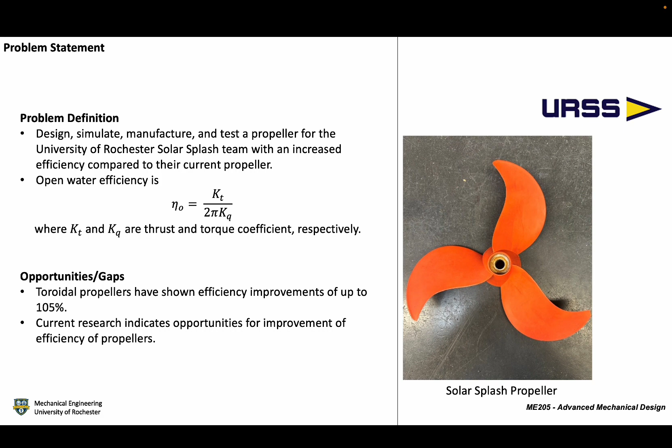In this case, there are three main deliverables that we are going to deliver to our customer, which is Solar Splash. First is the operational full-size propeller prototype that can fit onto the existing motor. Second is a technical report with testing data, procedure, result, and analysis of the propeller. Third is a theory of operation manual.

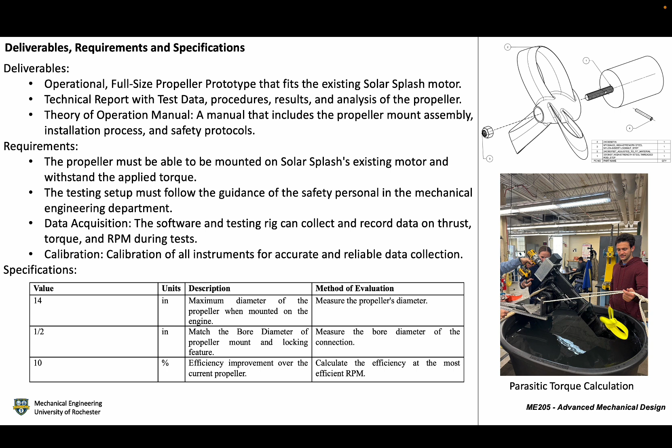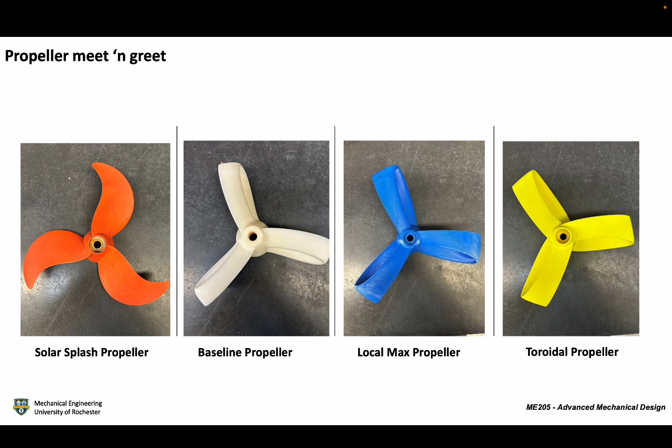So here we have a quick overview of the propellers involved in this project. The first one on the left is the current traditional propeller used by Solar Splash before the onset of this project. And then from left to right, the other three are in chronological order of the toroidal designs that we've made throughout the semester, with the first one being an initial conception mainly for the purposes of demonstrating the feasibility of manufacturing, and the yellow one on the far right being our final design.

The CAD generation was a key component of this project. We needed to create a CAD model that was easily adjustable, something where we could manipulate certain parameters quickly and easily so that we could quickly iterate and optimize our design without needing to go back and forth between our simulation software and our CAD modeling software. So in order to do that, we started by 3D scanning the original Solar Splash propeller. And then from there, we were able to extract the hub geometry and import that into a new model so that we could ensure that the new model would properly connect to the current motor and setup of the propeller.

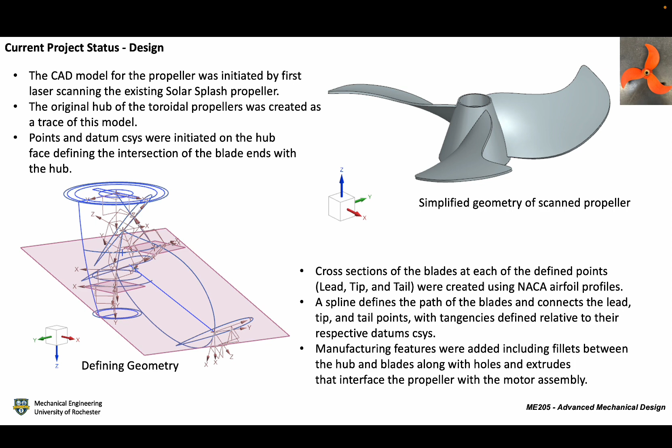One of the key components of this design is the cross sections of the blades. They are defined by NACA airfoils. Here you have the equations that govern the profile of the NACA airfoils. Using these airfoil shapes enhances our ability to control the aerodynamic qualities of the propeller blades, like the lift and the drag.

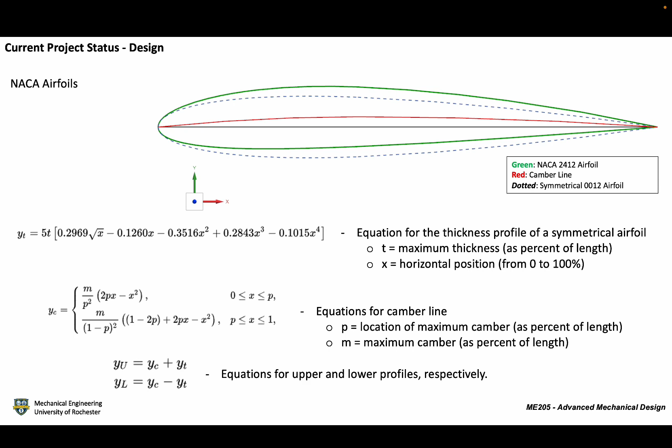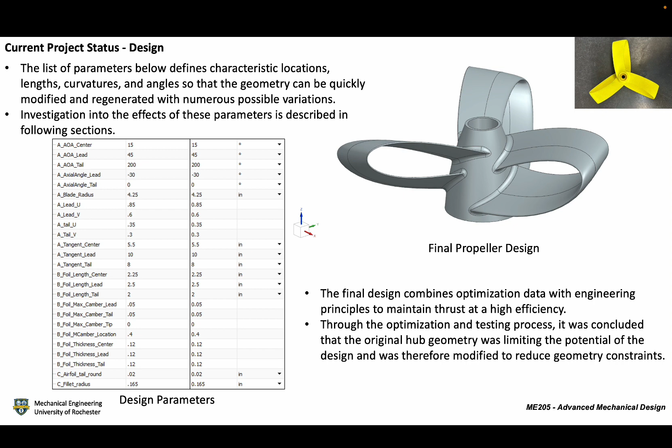So in the end, we ended up with a model that has quite a long list of parameters, as you can see here. These parameters are all numeric values that we can manipulate independently, so that we can import them into our CFD model and change them in there so we can cycle through design iterations quickly. These values dictate various locations, lengths, curvatures, and angles that define the overall geometry of the propeller. And as you'll see in the coming slides, we used this parameterized model to iterate and optimize using our CFD.

So a big part of this project was the optimization that would have to be done on our toroidal propeller design, and this meant that we would have to go through multiple different iterations of design. So we decided early on that the most efficient and economical way to go about this would be to create a CFD simulation that we could relate to our testing rig instead of having to 3D print and actually test every iteration we came up with. So to make this simulation, I followed a tutorial in Star CCM called the Marine Propeller in Open Water. And then I adjusted that tutorial to meet the needs of this project.

So one of the main adjustments I made was the geometry that was entered into the simulation. I created the geometry as an assembly in NX that's made up of a rotating region and a static region. And this made it so that I could sub in the new geometry for each toroidal iteration fairly quickly without changing anything else in the assembly. I could then transfer the design data from NX to Star CCM, and that includes the geometry and the associated parameters, which we would need for optimization later on.

So one of the main limitations to the simulation is that it has different assumptions than our testing rig. Our testing rig is done in stationary water, while this is an open water setup, which means that water is actually flowing past the propeller as it's rotating. And you can see that in this photo here, which is the vector velocity field of the water as it flows through the region. And I defined the speed of the water as the advancement velocity of the Solar Splash hull, which is defined as 1/2 times the square root of the length of the water line.

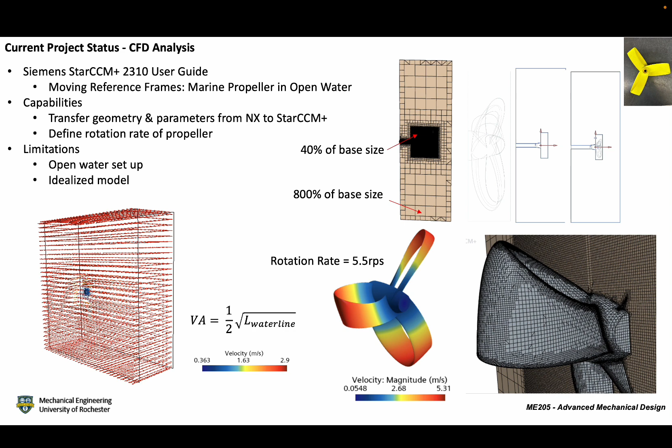Another limitation is that this is a very idealized model, which means it assumes a very smooth surface finish and that there's no deflection of the blades when it's rotating. We still decided to move forward with this simulation despite the limitations because the open water setup we believed would more accurately capture the operating conditions of the propeller when it's on the Solar Splash boat.

So once we created the simulation, the next step was to correlate our testing and simulation data. And this was done by running a series of tests on the Solar Splash propeller and our first toroidal iteration across a variety of RPMs, and then outputting the thrust. And then I took these RPMs and put them into the simulation and also output the thrust.

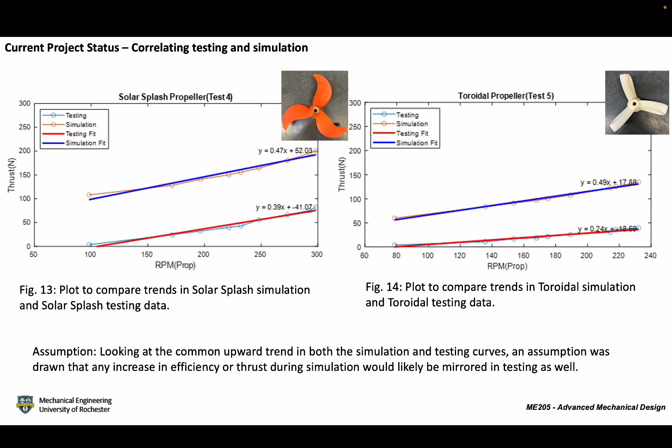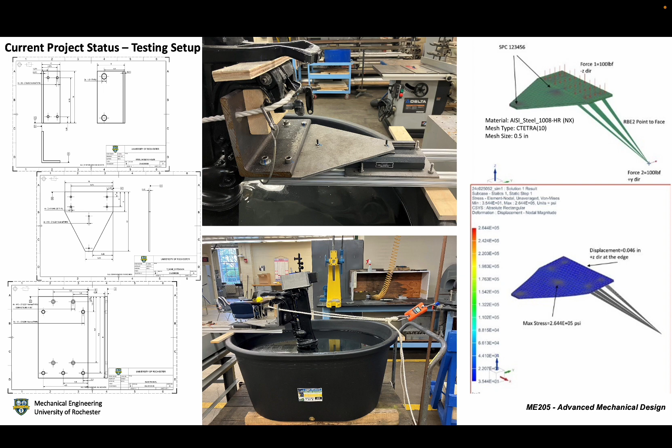Also, in order to get rid of excess displacement, we also did finite element analysis on the panel, shown on the right side of the screen. This will make sure that the condition of the panel after we put on the motor will be fine and provide enough testing data.

After finding the RPM of the motor from this equation, we use the gear ratio, which is the ratio between the number of drive shaft revolutions for one revolution of the propeller, and converted the RPM of the motor to the RPM of the propeller. The gear ratio we used is 0.58, and this was given to us by Solar Splash in their 2019 technical report. Conducting this test allowed us to measure the thrust values generated by the propeller for each RPM, which was important for calculating the coefficient of thrust, since it is in our equation to calculate efficiency.

With this test, we weren't able to calculate torque, which is needed for the coefficient of torque, which is the second half of our efficiency equation. Therefore, we had to come up with another procedure to measure torque. So for the second procedure, we used a power drill setup and a push-pull scale to measure the torque and thrust across various RPMs simultaneously. And we attached the power drill to the coupling of the motor.

So in this test, the power drill is what is driving the propeller instead of a set of batteries powering a motor. As the propeller rotates, there's a reaction force acting on the propeller, essentially trying to rotate the power drill in the opposite direction. To measure this resistance, which represents the torque generated by the motor, we use the push-pull scale. The handle of the power drill acted like an arm, so to get torque, we applied the push-pull scale to the end of the arm, which was approximately 6.5 inches.

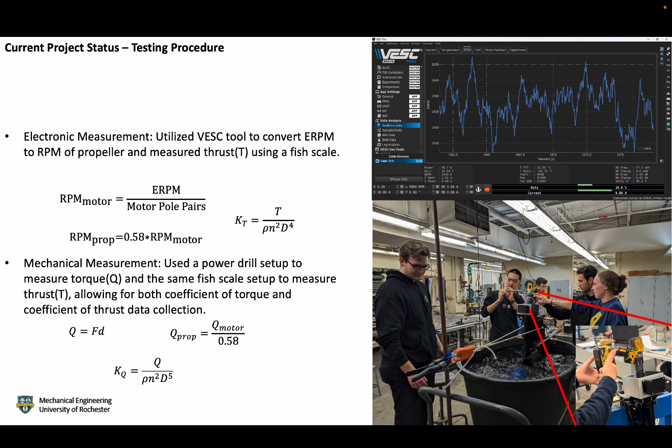So once we had set up the testing rig and had our first iteration of the toroidal propeller completed, we could start the optimization of the toroidal propeller. To do this, we used the Taguchi method to produce orthogonal arrays because that will minimize the combinations needed to map the trends of each parameter. And we chose this method because, as Henry said, there are many different parameters designed in the NX model, and it would be very time-consuming to go through and optimize all of them.

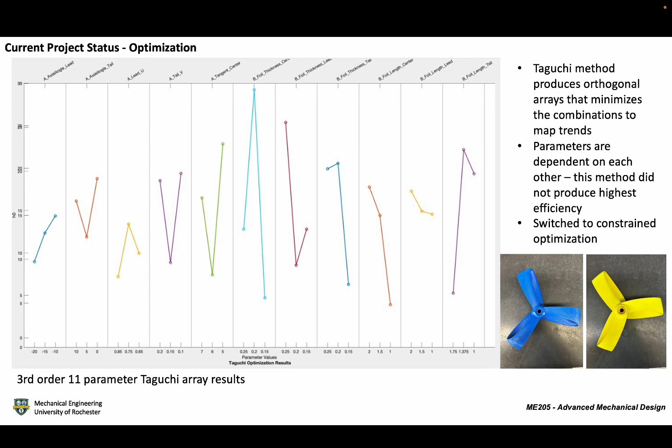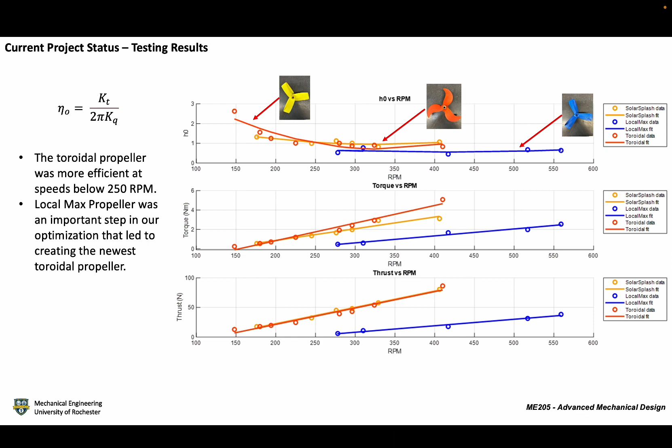We wanted to include the local maximum propeller in these graphs because it had the highest efficiency in simulation compared to all other propellers. However, as seen in the top graph, it produced the lowest efficiency in the physical test. Even though it produced the lowest torque, it also produced minimal thrust. It was from this observation that we focused on increasing thrust as much as possible, yet keeping efficiency at a high. This is where we came up with our final toroidal design, as seen in the yellow image.

Even with the newest optimized model, our final testing results indicate that we did not meet our efficiency improvement specification of 10%. However, we hypothesized since the beginning of the project that the aluminum manufactured propeller would perform better than the 3D printed one used in testing because the blades would experience less deflection. To quantify this, we ran an FEA on both the plastic 3D printed model and the aluminum one using the pressure loads outputted from the simulation running at 5.5 revolutions per second. We found that the aluminum model has around 97% less deformation than the plastic one. A lower deformation will increase the thrust produced by the propeller, thereby increasing efficiency.

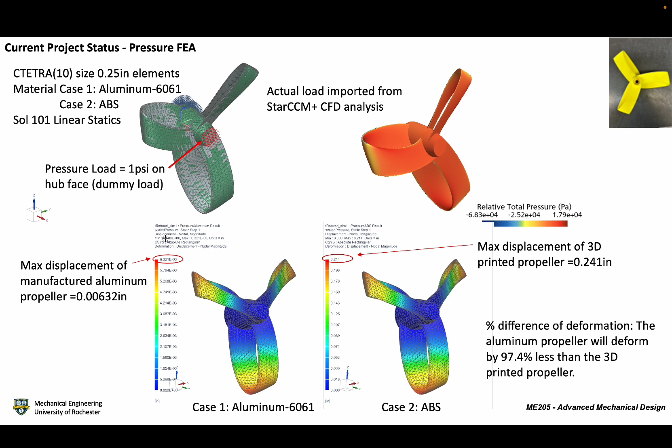So if we were to do this test again, the first thing we would want to change is our testing setup. We used a cattle trough as a tub for testing, which does not replicate open water conditions since the water is stationary. Another thing we would want to change is the way we tested torque. Using a torque sensor would eliminate much of the human error from our previous technique, giving us more accurate results. The next thing has to do with manufacturing. We had an issue with manufacturing time, so having a larger and more flexible budget would have allowed us to 3D print the final propeller out of metal.

Another one of the limitations of this project was a slight lack of preliminary specifications. In an ideal case, we would have had access to the motor power curves and the hull characteristics, which would allow us to essentially optimize the propeller to a specific RPM and required thrust to move the boat at its optimal speed. That information, however, was unavailable, so we had to run with an unconstrained optimization. So in the future, there's opportunity there for improvement with those preliminary specifications.

Additionally, the time constraints and computational constraints on this project limited the number of parameters we were able to test overall. There were several parameters that we were unable to map the efficiency curves for due to a lack of time.